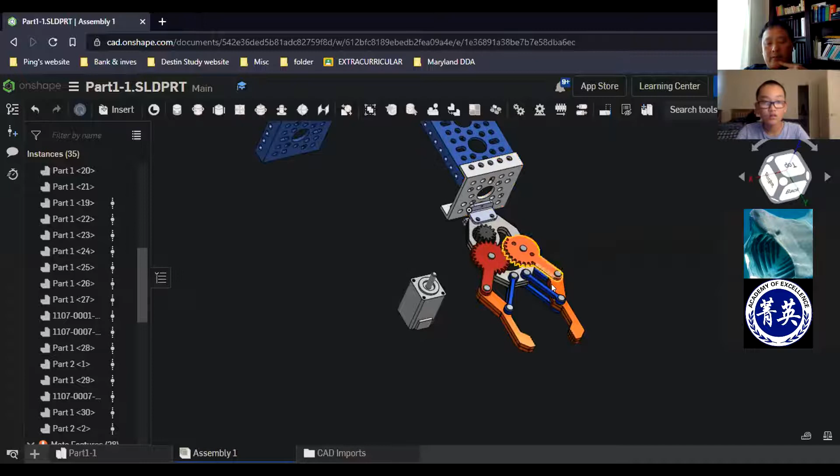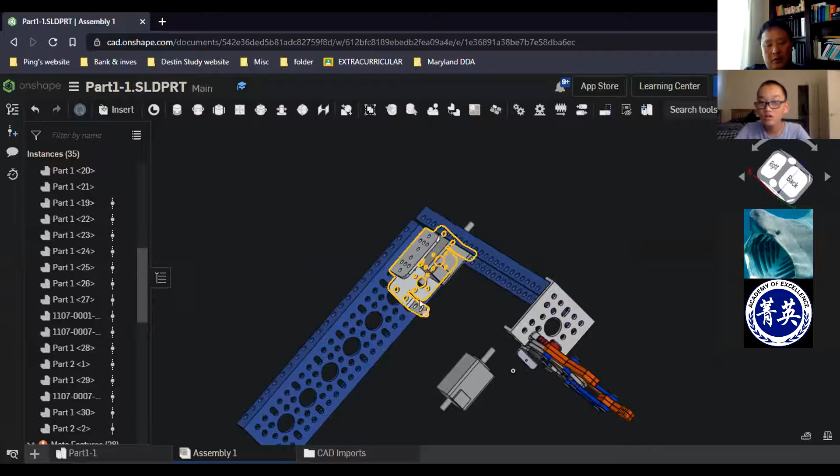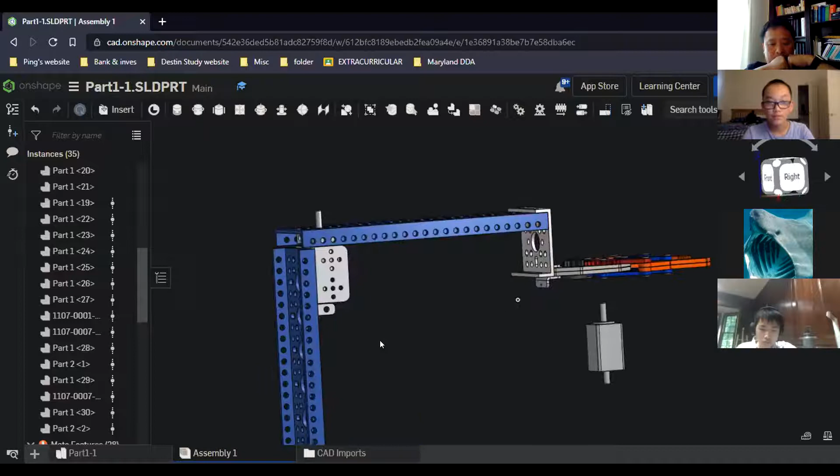So this gripper actually only came with the pieces. It took me a full day to put this together without instructions. The motor here, I couldn't find a clamp the right size for this either, but it should move this arm. So this can't actually pick up a wobble goal and lift it. If there was a sliding thing here, then it would. But it's a very flawed arm. Yeah, this is what I have.

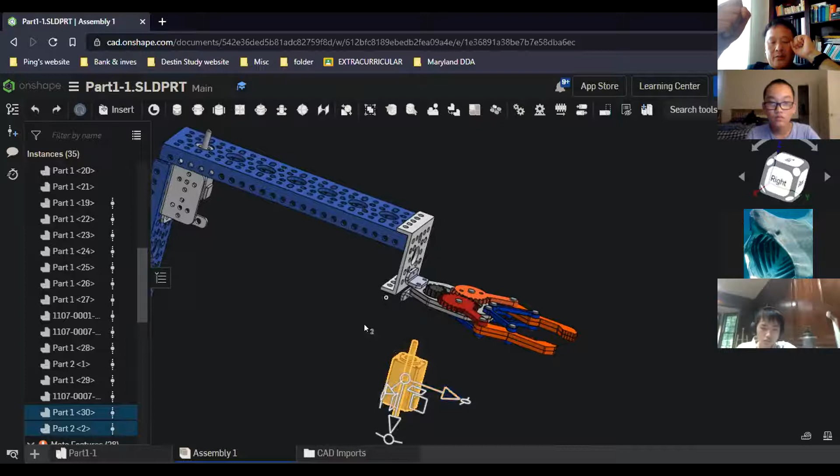So this one, I think you can. So you will use this motor to control the claw and grab it, right? But right now, this motor also doesn't fit in, because I couldn't find a small enough servo. Okay, I see it, so just pretend it's a servo. Yeah, okay, so you also cannot lift it at this moment because we do not have a slide for it.

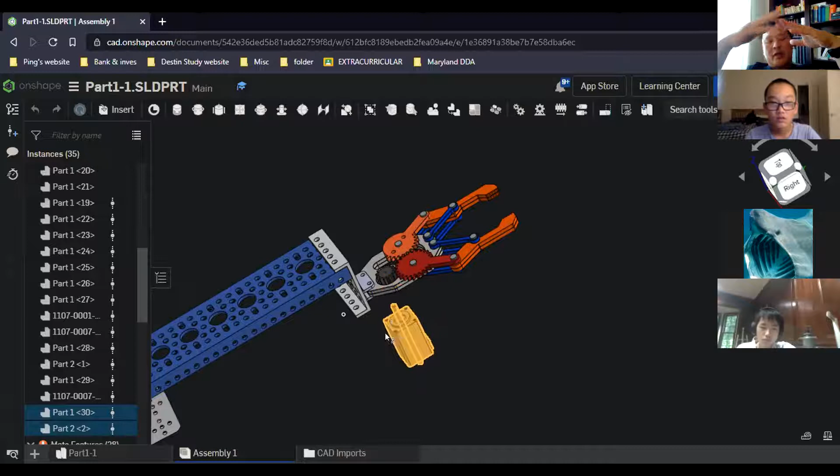Yeah, okay, so Christoph, I really want you to look at those because you are in a CAD class and that's very good for you. And these students only spent like 4 hours learning it, and they are doing a very good job here. So I want you to get to this level after your CAD class as well.

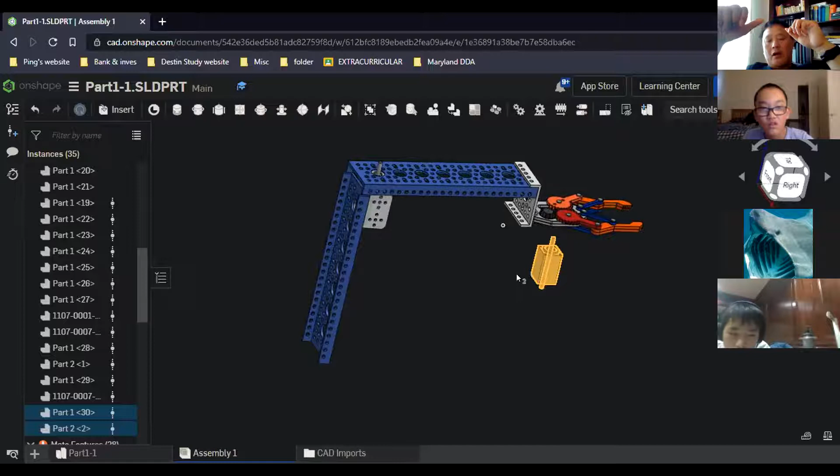Wait, let me fix this.

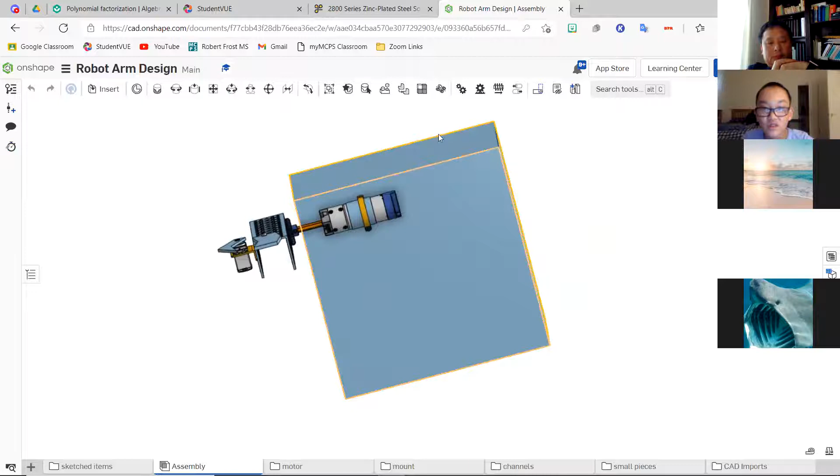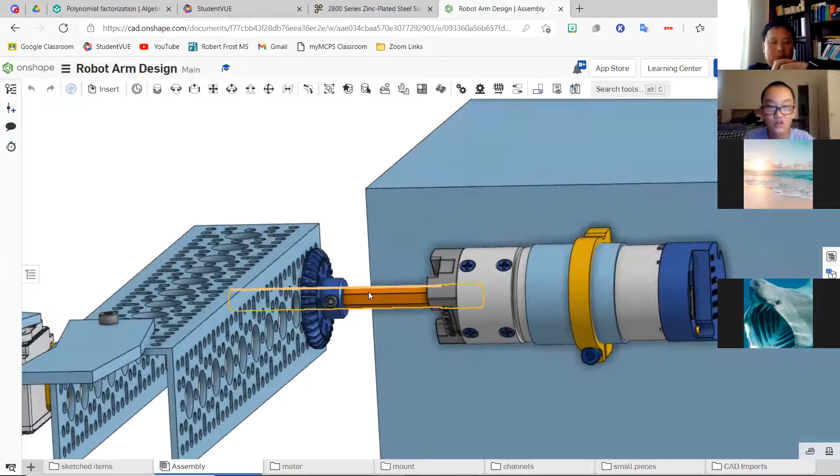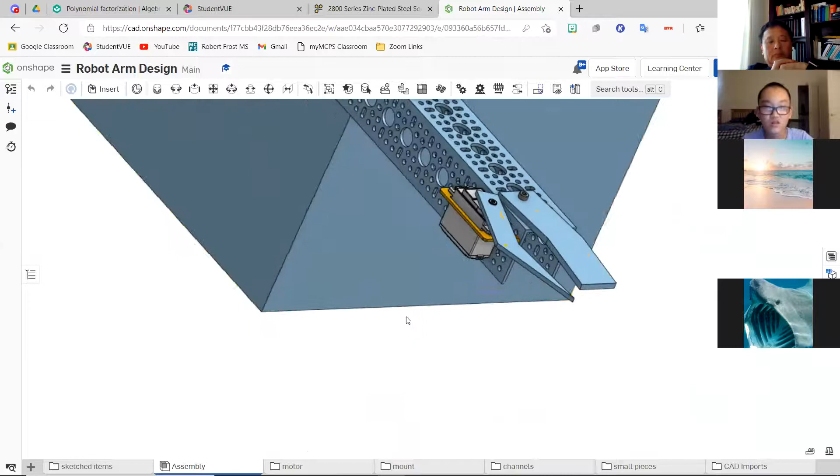So pretend the cube is the robot. So this is the arm, and this motor can be mounted on something behind it, like a channel or something. And then this blue piece connects the motor to the channel so it won't slip or slide. And then this is the main arm. This claw doesn't move, but this one does, and it's connected to a servo that moves it in and out. So you just slide the wobble goal against here and close this. I'm not sure if it's foolproof, but that's what I have.

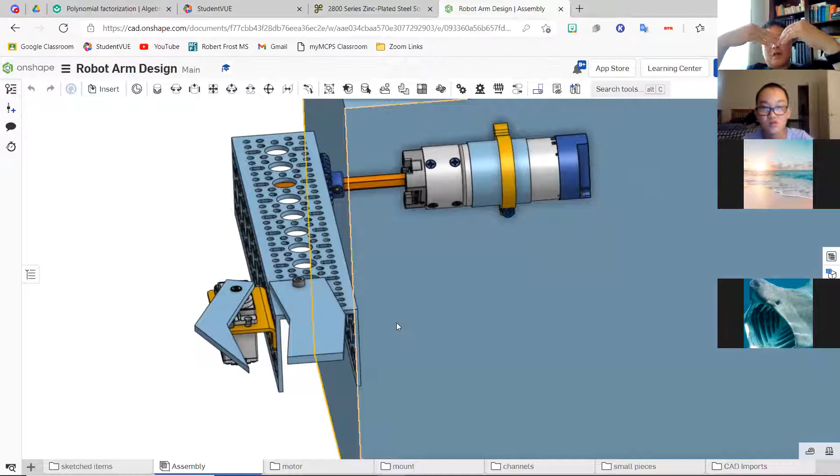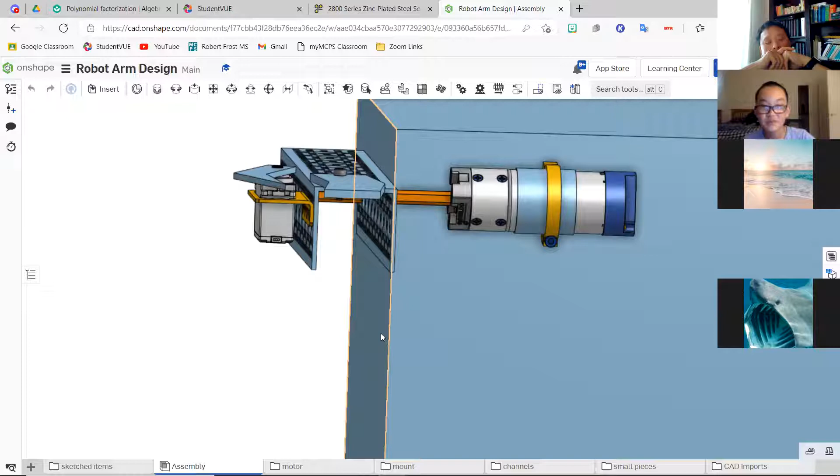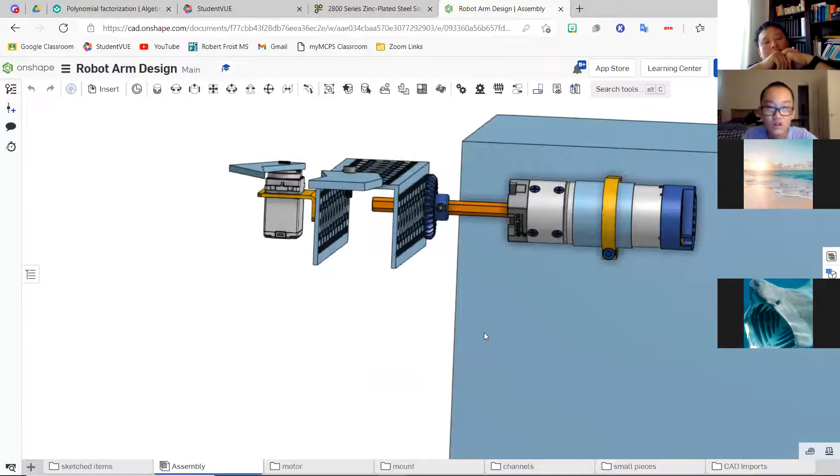Let me ask you, are those two claws at the same level, or is one higher than the other? Oh yeah, one is slightly higher, which I think might make the wobble tilted. Okay good, you needed to make it higher, because if not, you see you have this angle in one of the claws. I think that may not hold the wobble well with that. Okay, that's what I'm thinking, because you can close the claw more and tighter. Oh okay, wait, so one claw higher than the other? Or? Yeah, it needs to be a little bit higher, I believe.

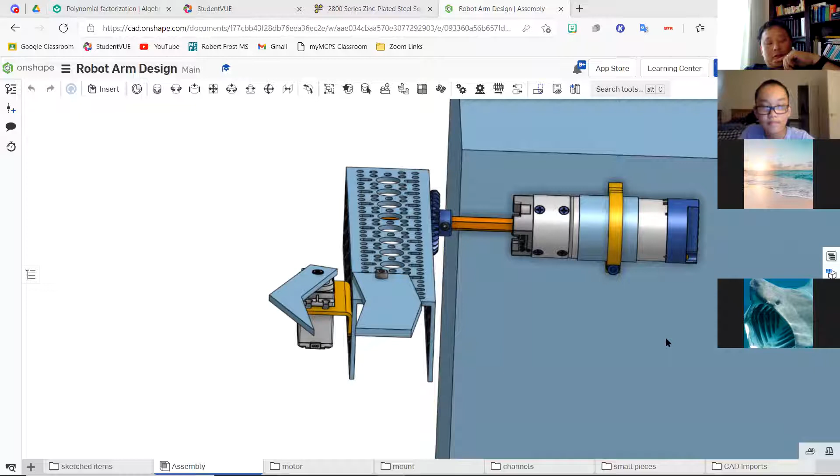So you see this one, so this is the claw and this is another one. So you can go ahead and close it, right? So you go ahead, you can close it more. Without that, I think, depends. If I move the mouse, you may not be able to see it. When you move the mouse to the claw, because you will have a hole there, I'm not sure that will hold your wobble well or not. That's what I'm thinking. You can try with this design, and you can try when you build it, and see which one will be better.

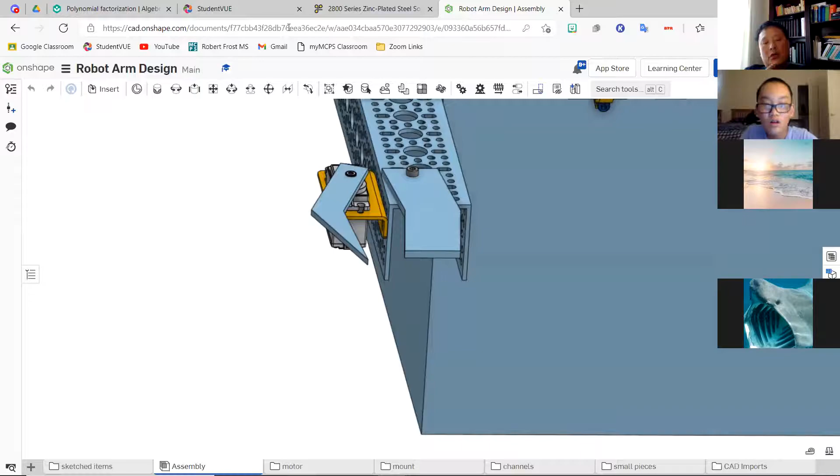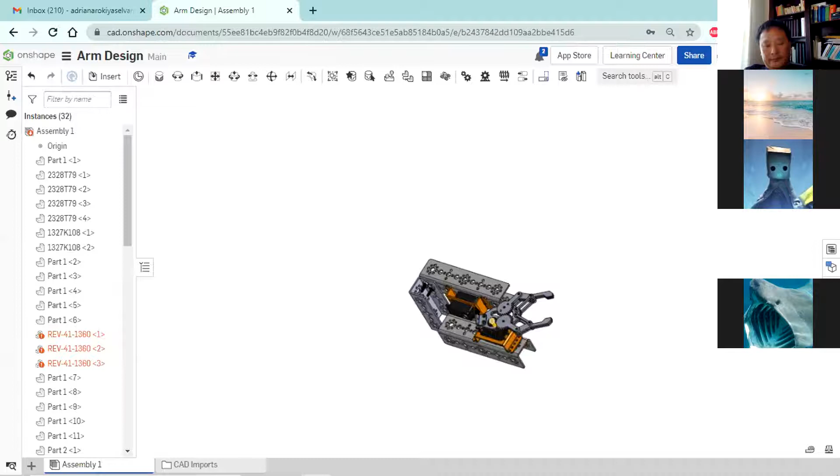Can you present yours? So this is the one on the line, and these are continuous servos. I guess there should be a stopper here. These are the Rev, I got them from the Rev servo mounts, and this part just connects to the robot, I guess.

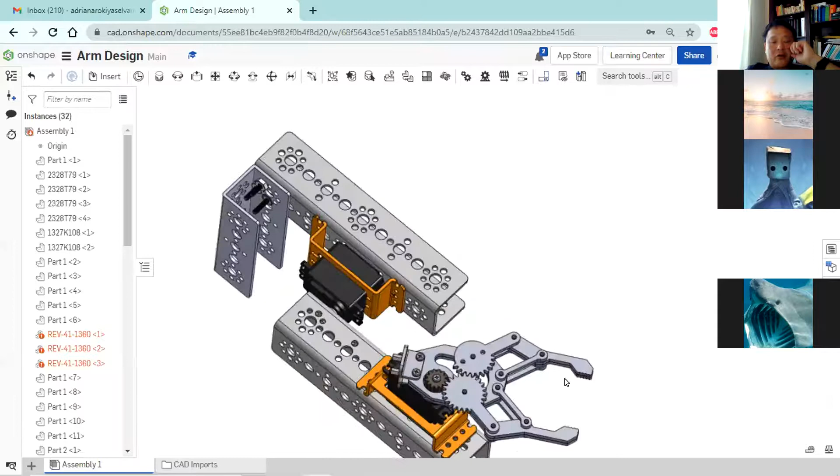Can you just zoom in a little bit, make it a little bit bigger, Adrian? Oh okay, you have a very good design because you can lift it, you can hold it. Yeah, looks very good.

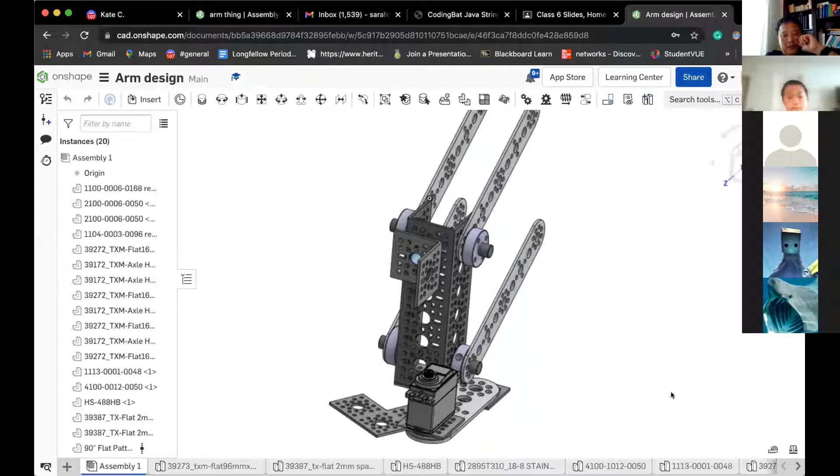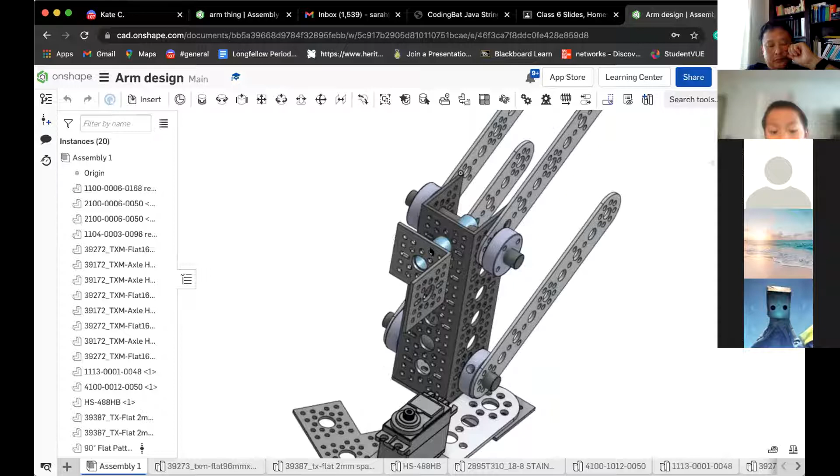So this is my design, and basically this is the U channel and connects these hubs, axles, and everything. And this is what lifts the entire wobble and everything up. And then right here is what holds on to the wobble. And this is just to make sure it actually gets in the right position. This is a servo to move this.

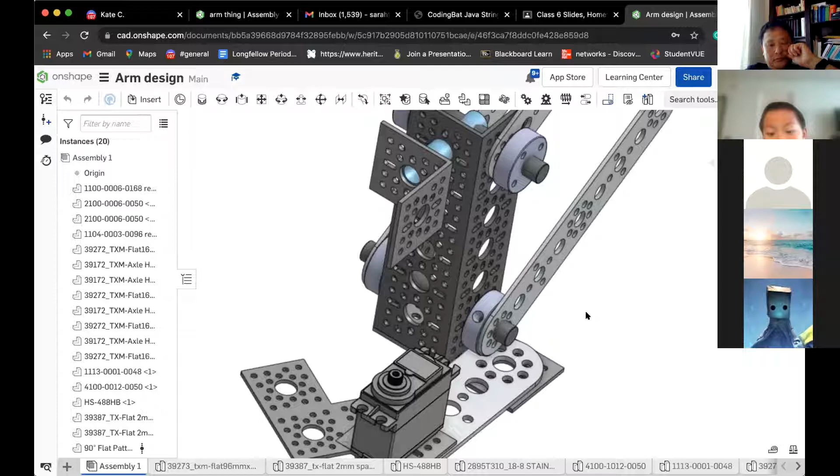And I think I want to point out one flaw about this: when I was CADing this, there were a lot of pieces I couldn't find the exact size for. So I adjusted the size a bit for some of these pieces. So I think when building it, it'll be hard to find the pieces, but I hope it will work.

Okay, if you needed them and you have a design, actually we can use a 3D printer to print it out. We have a 3D printer. So if you think that's your design and you are sure on it, and if you want it, you can print it out. But just keep in mind the 3D printer material, so we need to think about that, what kind of material we wanted to use.

I think it's good. And then let me check. Kate, can you talk about yours, Kate? Okay.

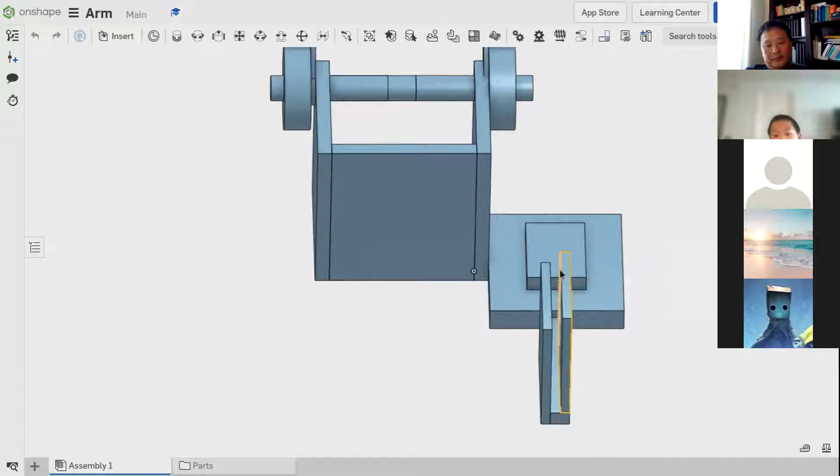So I was thinking the arm goes right here, this is the thing where it opens. Right now it's closed, so when it opens it'll grab onto the wobble goal and then it'll close and go up on this platform. It'll rest there until it's time to put the wobble goal down. It'll go down this stick right here, go down, then open and drop it.

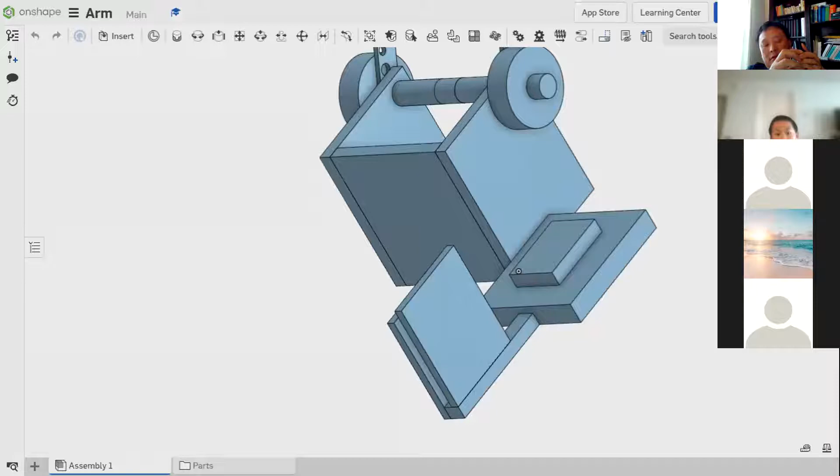Oh, I don't get it. Can you show it again? So I see you have a parallel plate, and you're trying to use this parallel plate to hold the wobble. The arm just holds it there. Oh, those two, okay. Then what will move those claws? Do you have a servo, motor, anything in your design? I was going to think about that a little bit more. I'm not really sure so far.

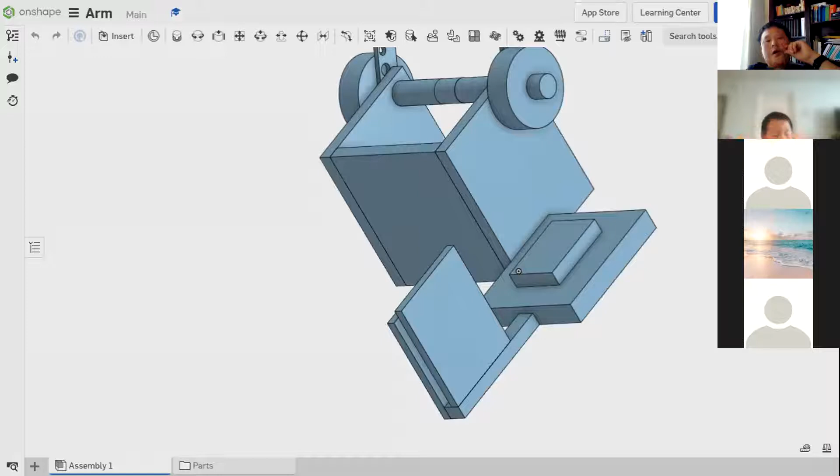Okay good, so you're new and you got this design, it's really a very good job. So how about you, Tang? Can you share your design?

So Usher, can you share yours? Can you present yours? Usher? I don't have one. You don't have a design. Okay, so...

Francois. Sure. Can you see my screen? Yep. Okay, so here's my design.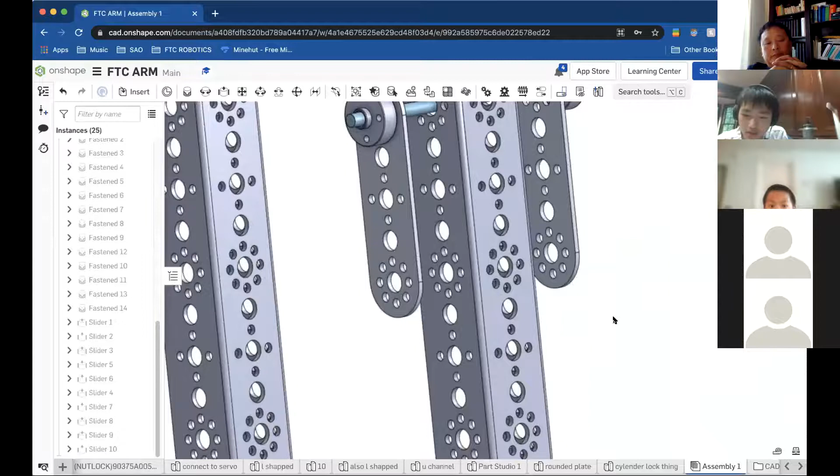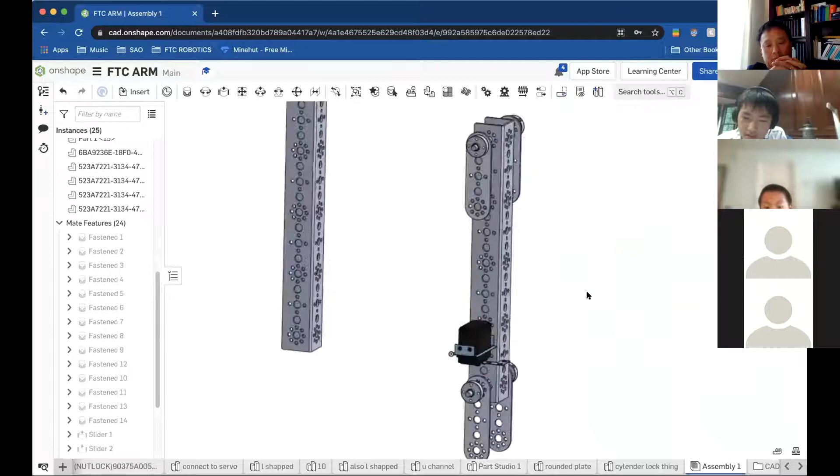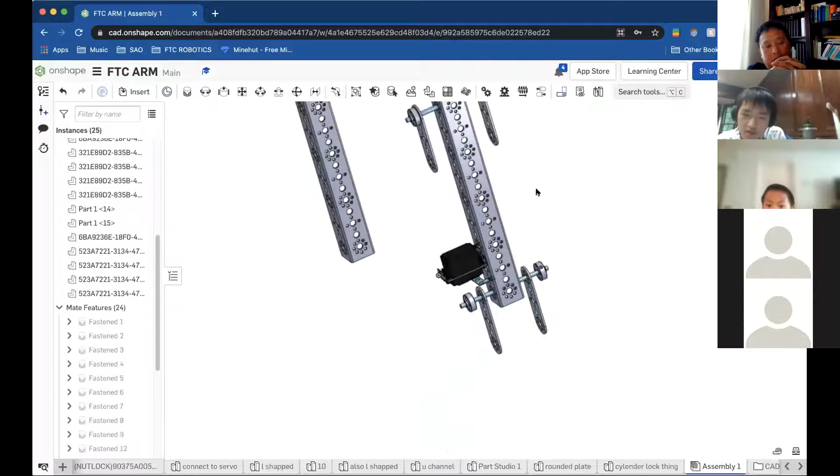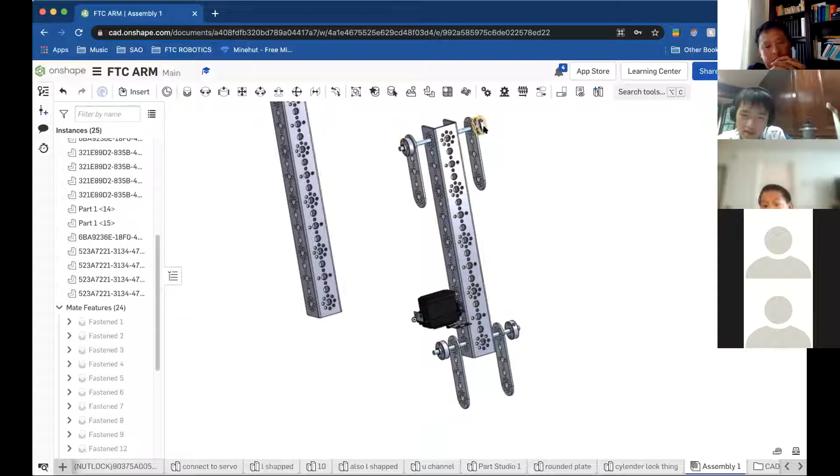It's a little big because I couldn't find a U channel that was smaller. Ignore this thing back here, oh it's moved to the side. Anyway, so the servo is here, and there's a claw thing here that I made kind of angled so it grabs onto the rubber part of the wobble. It wouldn't fit perfectly, so it would be slightly angled backwards, which I think would increase the stability. And these four things on the corners, 1, 2, 3, 4, are supposed to be angled backwards, but I couldn't get them to angle backwards, and it was also supposed to be connected to this U channel. So there should be a servo connected to it to move this entire arm up and down, so you can pick it up and drop it over the side. And these four things are just to make sure the plates don't fall off. That's about it, so the plates do not fall off.

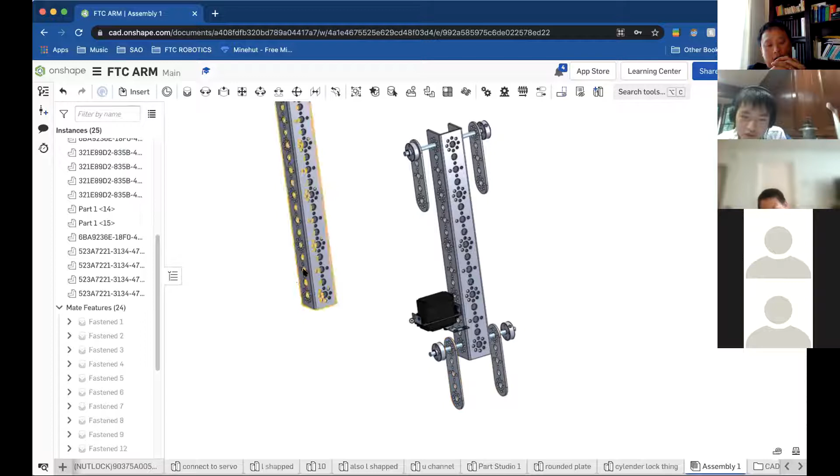What plate do you mean? This thing, it's supposed to be angled backwards. Angled, okay, like backwards to connect to this, but I couldn't get them to angle backwards. Okay, I see what he meant.

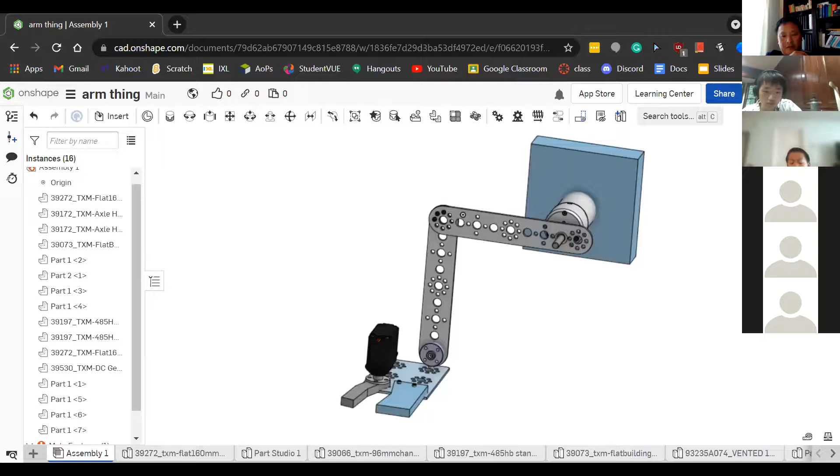All right, so Jason, because I started recording late, I haven't recorded your design, can you just do it again? I'm sorry about that. So Adrian, talk about that.

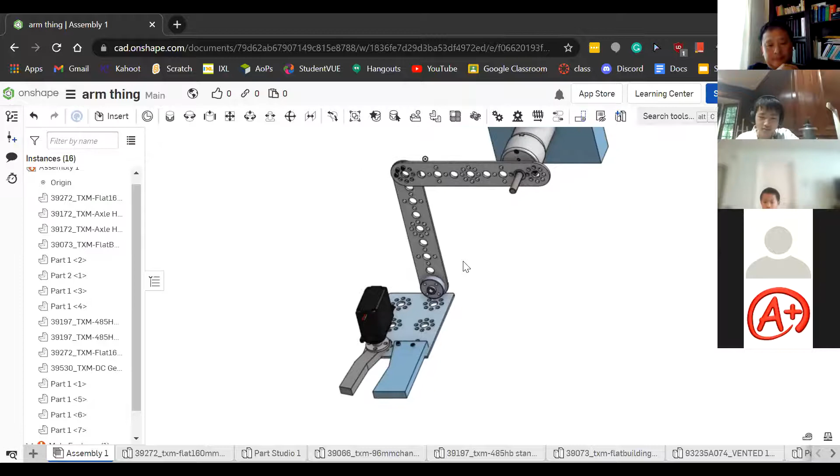The blue part of the claw stays the same, and the gray claw rotates to grab the wobble goal. And this part rotates it to make it go up. Yep, now yes, now it will go up. Yes, very good. So Tan, are you ready?

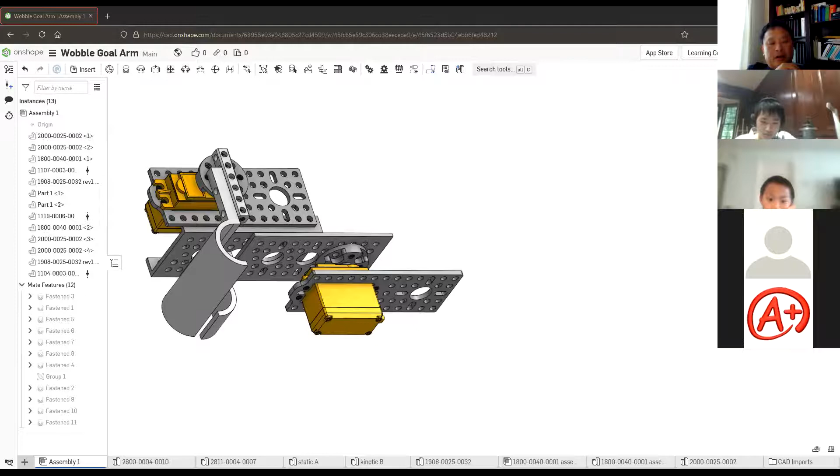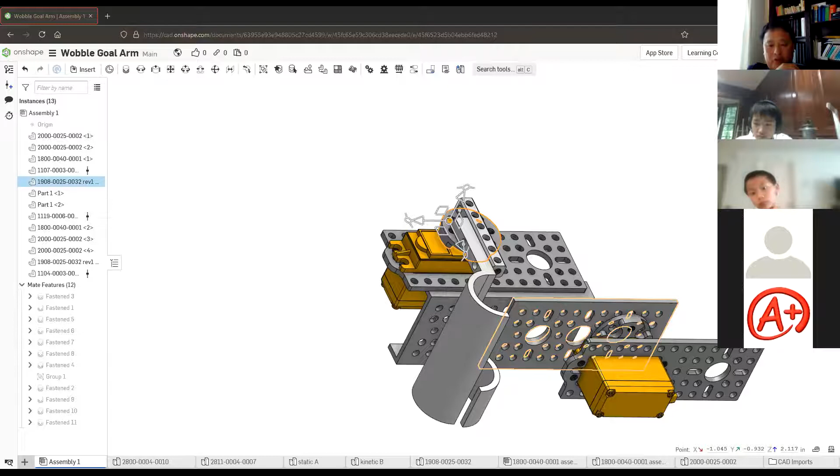All right, can you zoom in a little bit, and then turn it around. Let's look at it from different angles, and because you cannot speak, I may ask you questions and you can show your answers. Okay, where's your claw? Can you point to your claw? You use it to grab the wobble. Okay, okay, I see it now.

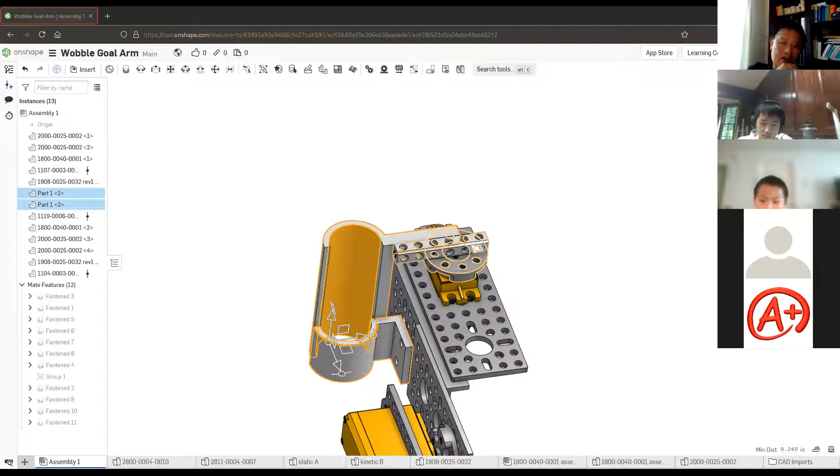All right, so how can you lift it? Can you show me how it works, when you want to lift it with that. All right, yeah, I see. Now I see it because I see these servos. Yes, it can lift it. Very good. Thank you, Tan.

All right, so now I want you both, okay, Jingjing and Adrian, you both need to lead your team to select one design. Jingjing and Adrian, you both need to tell me which one you want to use. So can you guys do a discussion if you have a Discord? If not, I can send you guys to another breakout room so you can discuss and get back to me. So which way do you guys want to do?

Oh Evan, sorry about that, I'm so sorry Evan, you need to show yours. My bad, Evan, go ahead, you have a very good one as well. Yes.

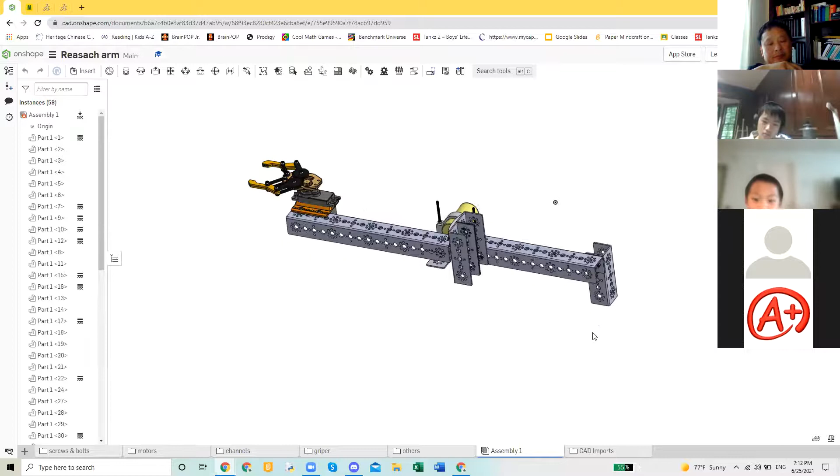Arvin, go ahead and present yours. So this is my arm. This is the first motor that spins the arm up and down, and this is the motor that controls the claw.

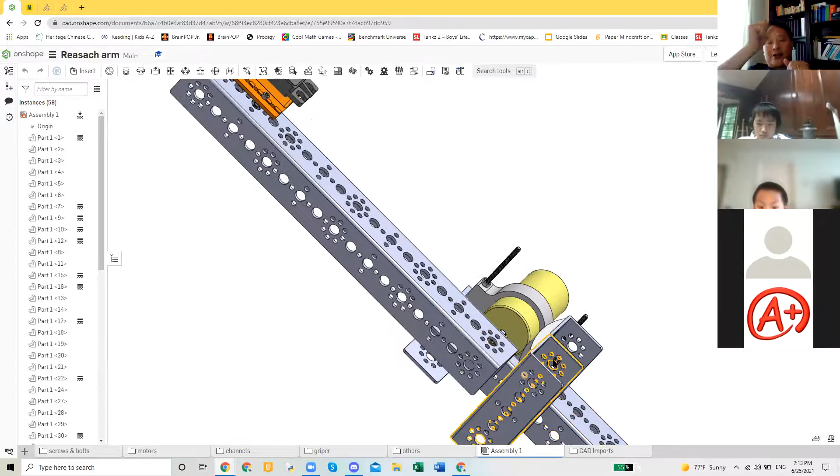Yes, and you have all the components. When I first saw this, I said wow, Arvin, you are so wonderful. You have everything and it works the way it needs to work. You can grab it and lift it, you have everything there. It's so good.

I did not ask you to present, but I know you finished it very early on this one. Wonderful job.

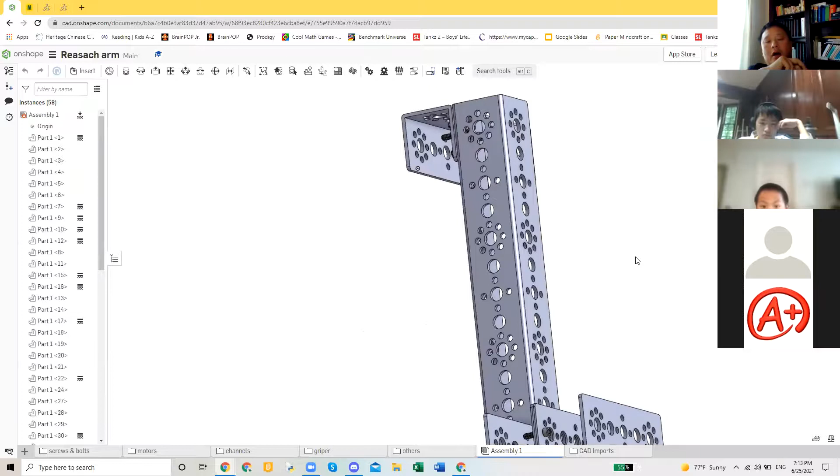I need the team to go ahead and discuss, and then you choose the one. This time, do not choose the one that will not work. If it doesn't work, that means your entire team will fail. I want the arm to be able to grab the wobble or lift it and transport it. So that's the next thing you guys need to do.

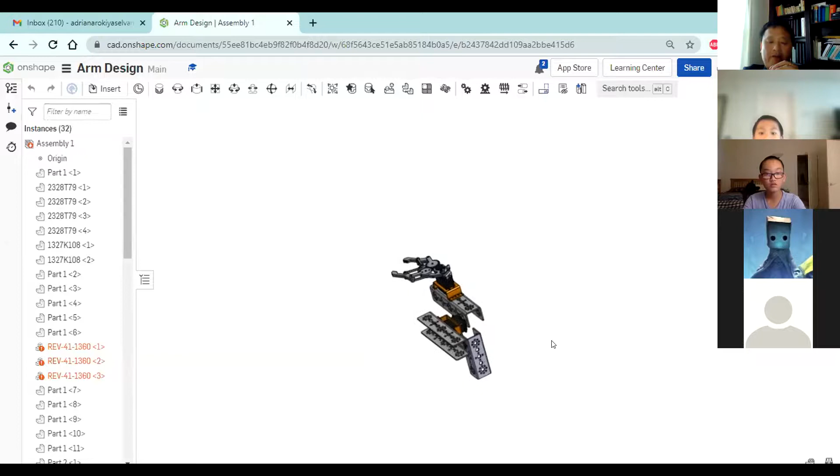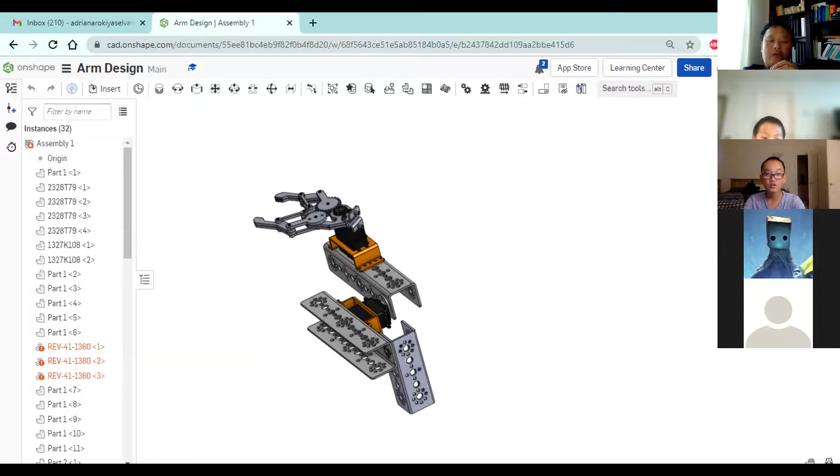So come to the center and check the parts, see if we have all of those. If not, we need to go buy it. So you need to come this Sunday, we need to decide it.

All right, so for the team of Devin, which one are you guys going to use? We're still voting, but half the members aren't here. Okay, go ahead, keep voting, that's fine. How about you, Adrian's son, is your team finished?

We chose Sarah's. Can you ask Sarah? It's Sarah's, right? Adrian, is it Sarah's, right? Yeah. Can Sarah present again?

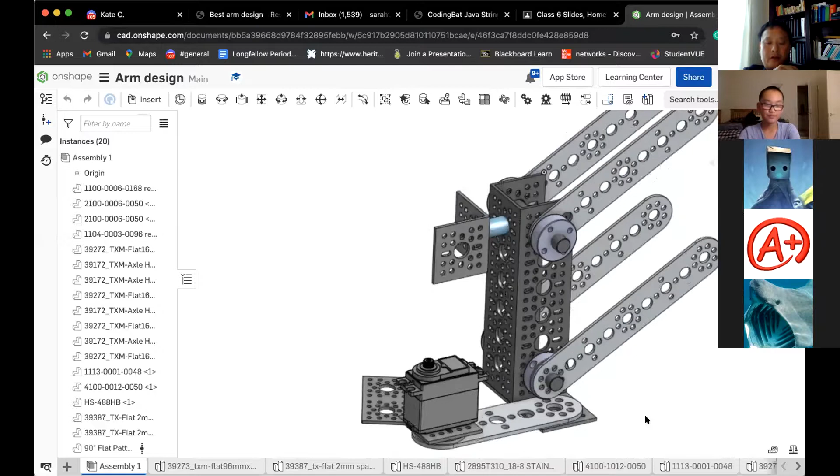Yeah, okay, this will be the design. Zoom out a little bit. Okay, so this will be that for Adrian's son's team.

Okay, you also need to come to the center as well. I know, Sarah, you are not in DC, but the team, at least the representatives, need to come and decide what we need to buy, what we will use, what we already have.

All right, so how about you, Devin? What arm did we pick? We picked Evan's, for the people who are actually voting anyway. Who's the team, who picks whose design? We picked Evan's. Oh, Evan's.

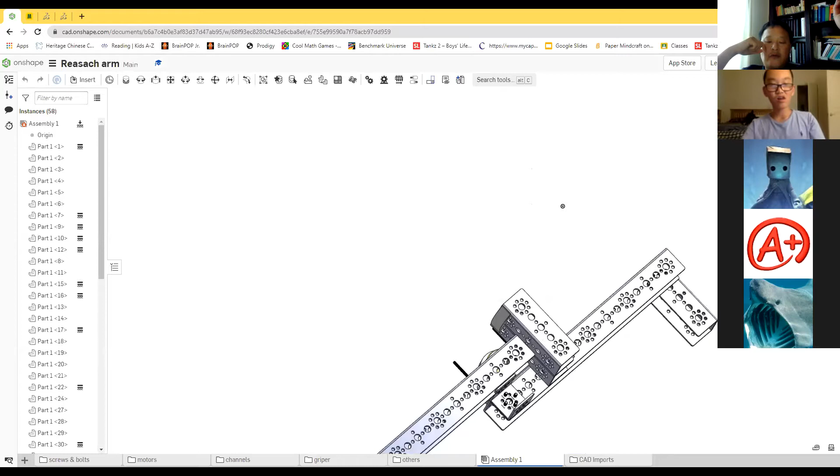Erwin, congratulations, can you present it again, Erwin? All right, so that is Erwin's design for the team led by Devin, so we will use that one. So Erwin, you need to come to the center.

So the team needs to come to the center and decide what we need to buy, because we do have a motor, we do have a U channel, we have a lot of things as well, but we need to check if we have everything. If not, I need a list so we can go buy it quickly, so then next week we can start building it.

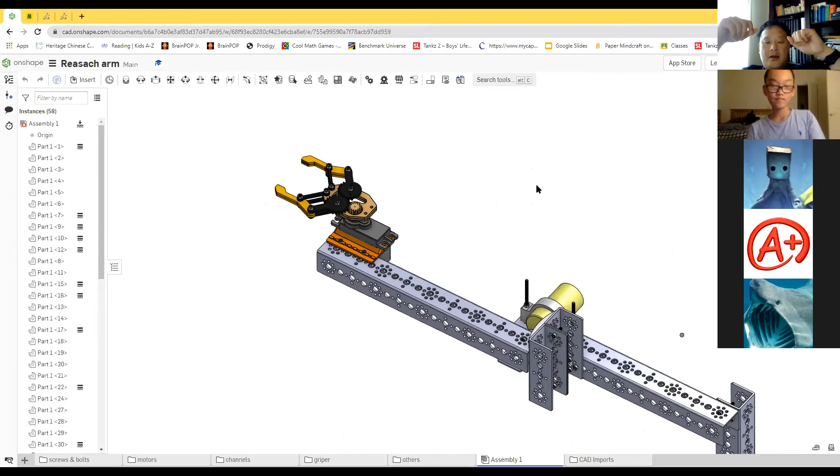Okay, claw is not stabilized. Looks good, but the claw is not stabilized, it can move, it can turn.